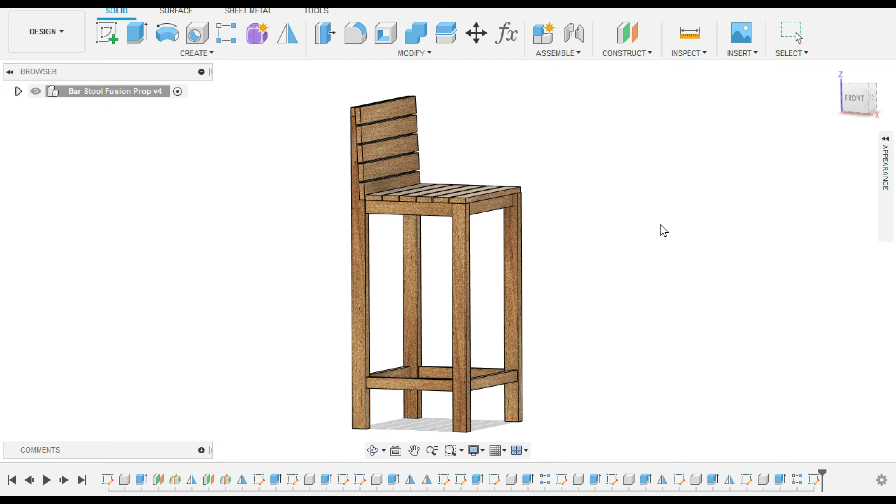Okay, the first thing I'm doing is saving the file. The reason I'm doing this, and I don't always show it, is that you always want to save at the very beginning in Fusion 360 because it starts the auto save feature kicking in. So always save your project first. From there, I just select the plane I'm going to be using and get right into it.

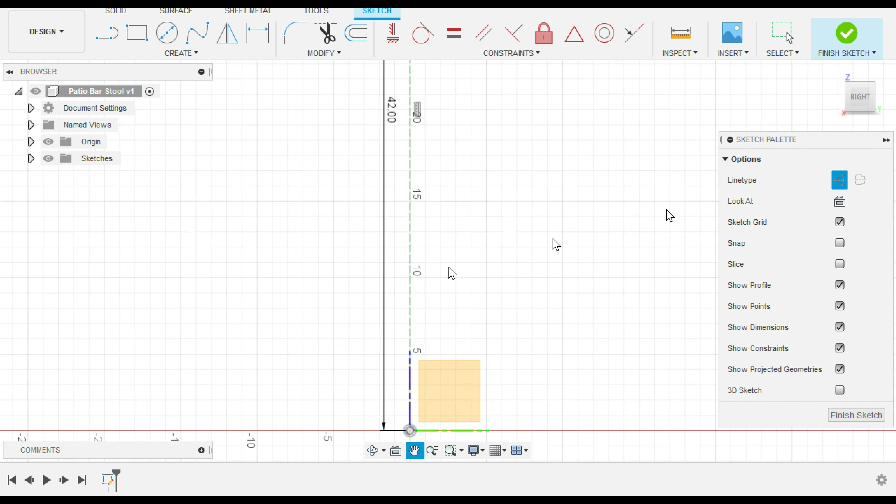And I am doing a construction line first on this one. I don't always do that, but it does help tremendously, again, for mirroring or anything along those lines.

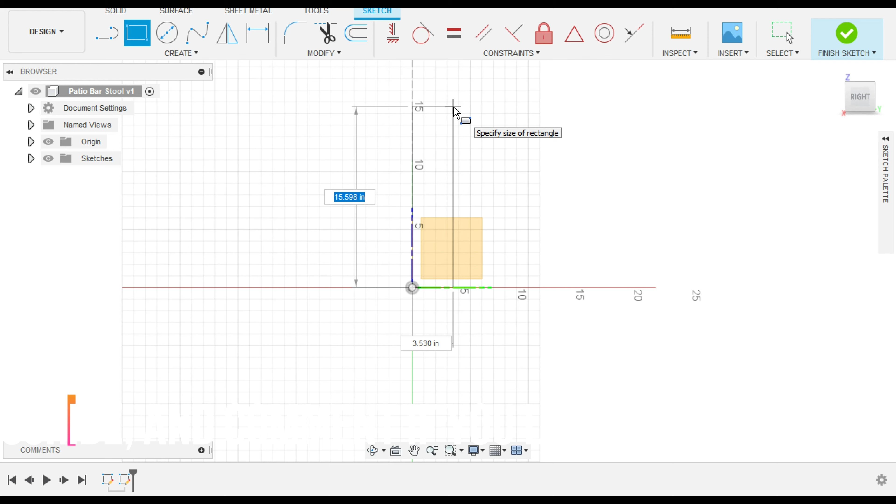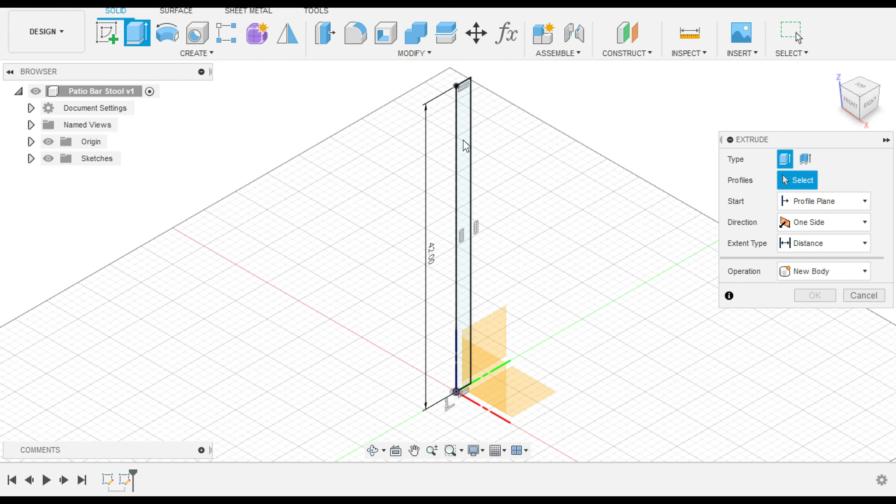I didn't do parametric modeling on this one because I didn't really think someone was going to want different size patio chairs, height and width, on this particular design. It's a very specific design. When I go to extrude this, I couldn't really decide if I wanted to bring the legs out like a 3-inch leg or a 2-inch leg, so I kind of met in the middle because I wanted to keep it a simple looking patio chair, but I wanted one thing for sure, and that is a back, because these are more of a bar stool than a patio chair. I probably should have said that at the beginning.

Okay, so we're setting up the offset planes so that we can then set up, as I did there, the mid plane so that we can mirror all of these components.

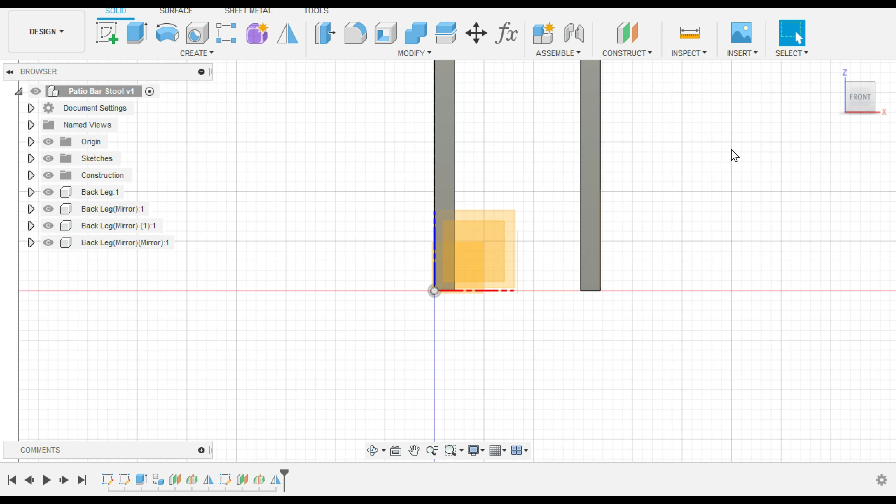So the back legs are going to be copied up into the front. Now, I'm not going to have a bar stool, as you saw at the beginning, that has all 4 legs that are the same size. You're going to see a little bit here in the video how I go about getting the front legs shorter than the back.

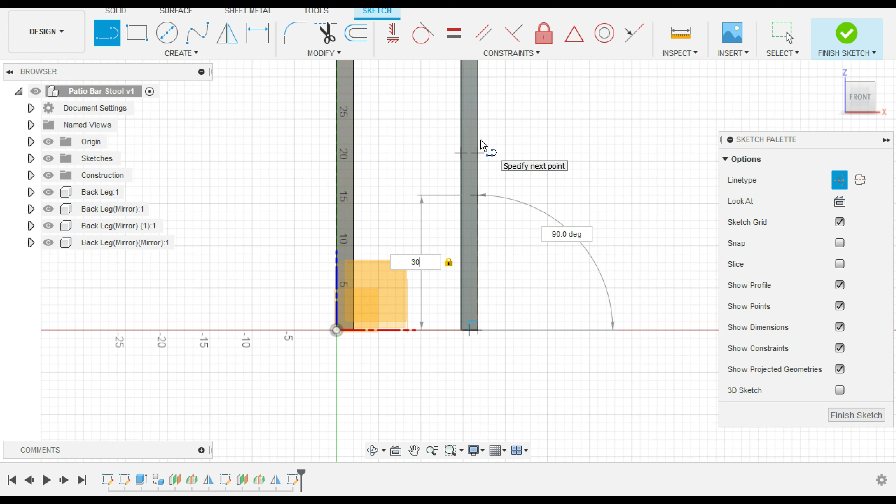So what I'm doing here is setting the construction line to the height of the seat that I want. This way I can cut this material.

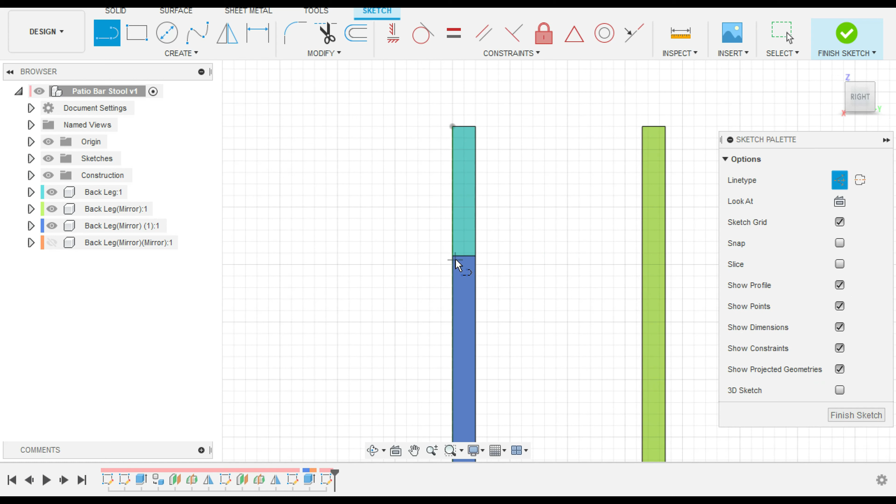So as you can see, I've changed the colors of the components. This is so helpful in this particular situation as an example, because I need to hide the front legs of this bar stool so that I can draw in the supports from behind them. I couldn't do that if it was in the way, so I can turn one off. I know that I turned off the right one because it has the correct color. Not only that, but you can see the correct color on the right with what I'm working on in the sketch, and on the left, you can see it in the list, so you know which color you're working with by simply using this feature.

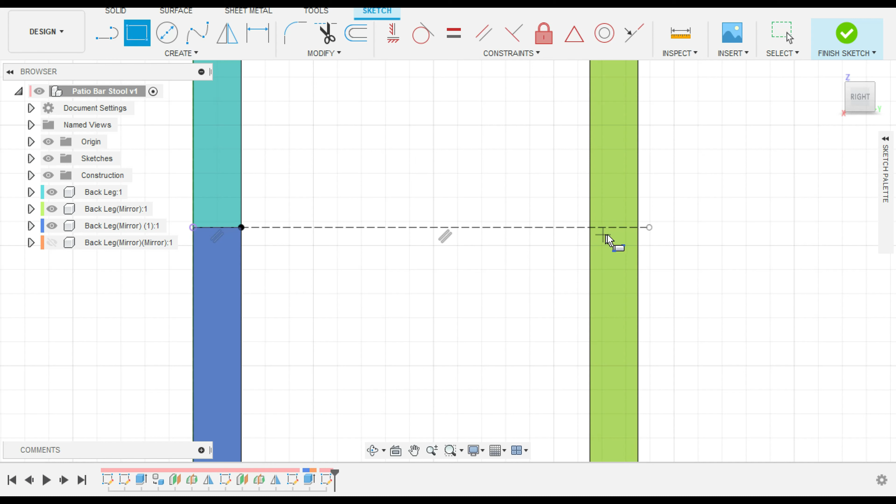And also this construction line, which I'm drawing across from the leg that is still turned on in the front, is going to serve two purposes. It's going to let me know where the leg height is supposed to be, and it's going to allow me to have something to tie constraints to for the locations of the seat supports, which I'm drawing in now. I will use the construction line to make them collinear.

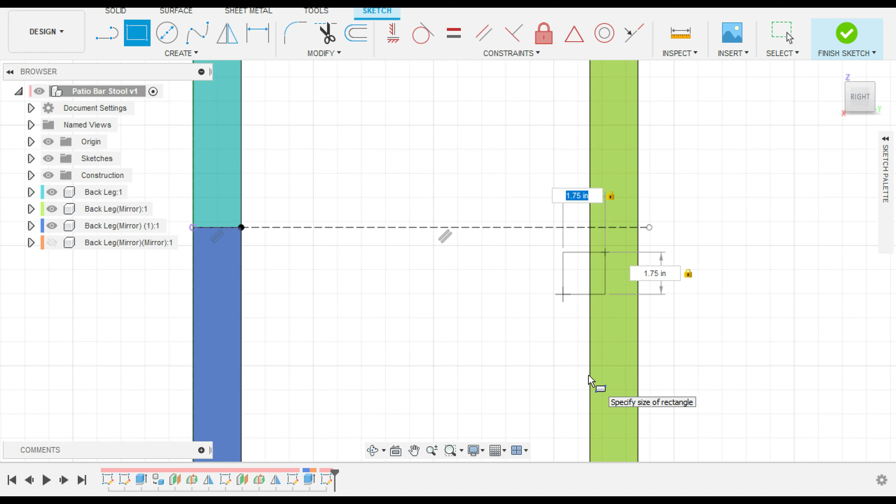So just a great feature, being able to turn the components into all different colors so that you can easily see which one you're working with.

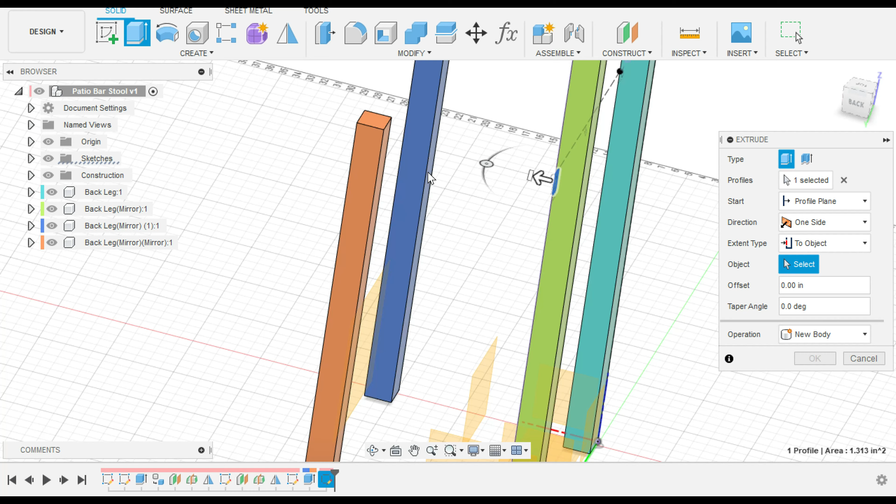So once you have that sketch drawn in, you just extrude it to the object, which is the front leg, and those two will be at the correct length and perfectly matched up.

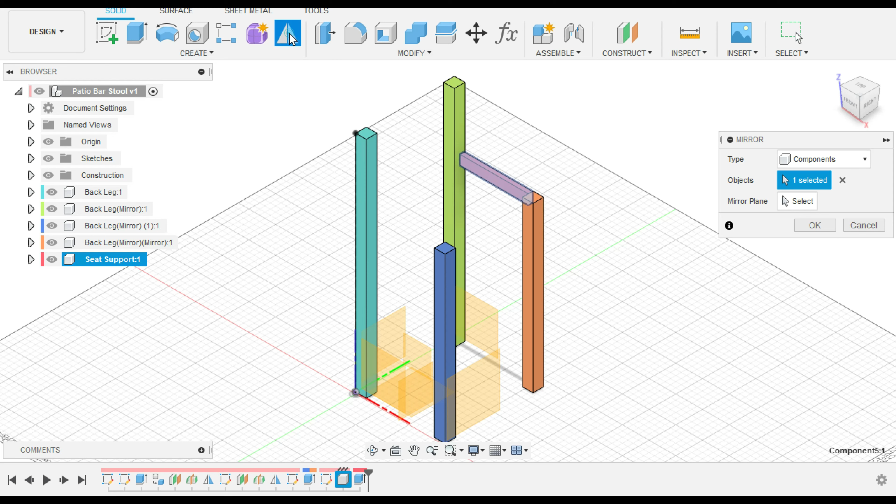Now, you may be wondering, if you're a woodworker, how am I going to attach these parts? I'm not going to use just wood glue and duct tape. I will probably use pocket screws, which is why you're not seeing a mortise and tenon setup. Now, I may still change to a mortise and tenon connection for these joints, but I'm not doing it on this video, but I will do one in a future video if you're interested. The mortise and tenon joints used in woodworking can be easily added to, well, maybe not easily added, but once you learn how to do it, it's pretty simple, into Fusion 360.

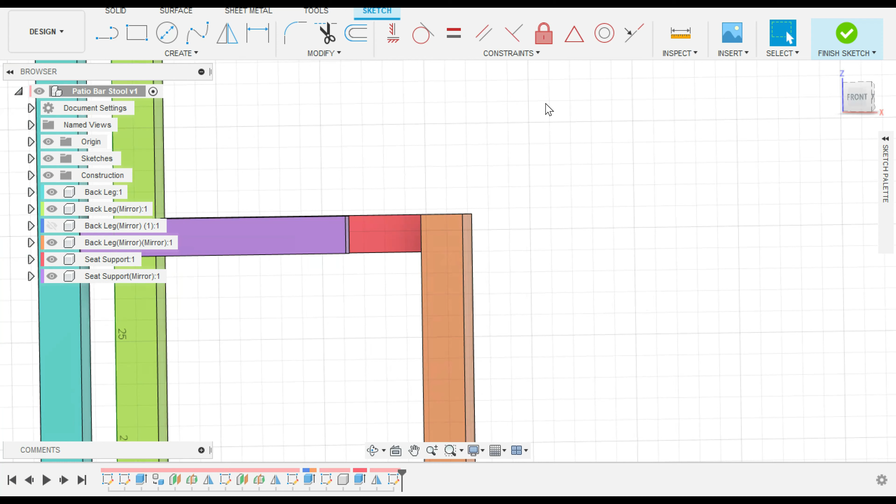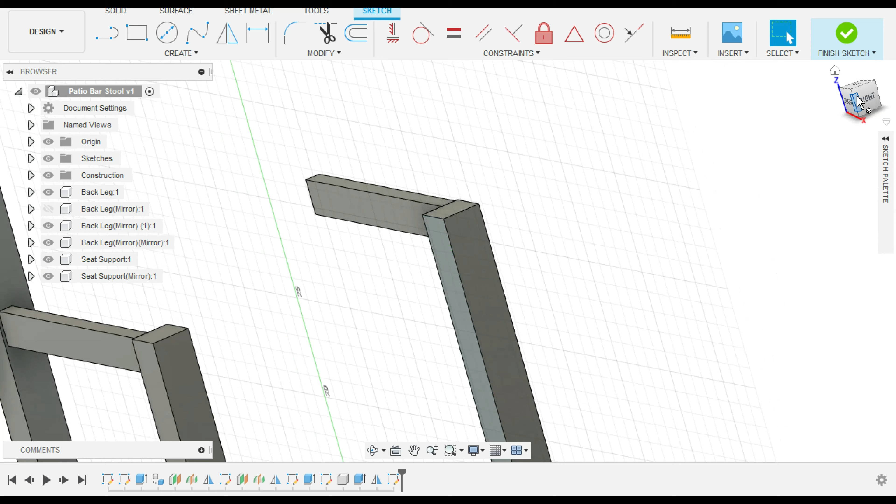And also when you go to print your part, say you're using a CNC machine, the mortises and the tenons and everything will reflect that on your actual components on your material list that you can export. So another great feature of Fusion 360. It's just got a great way of putting those particular joints into your woodworking projects.

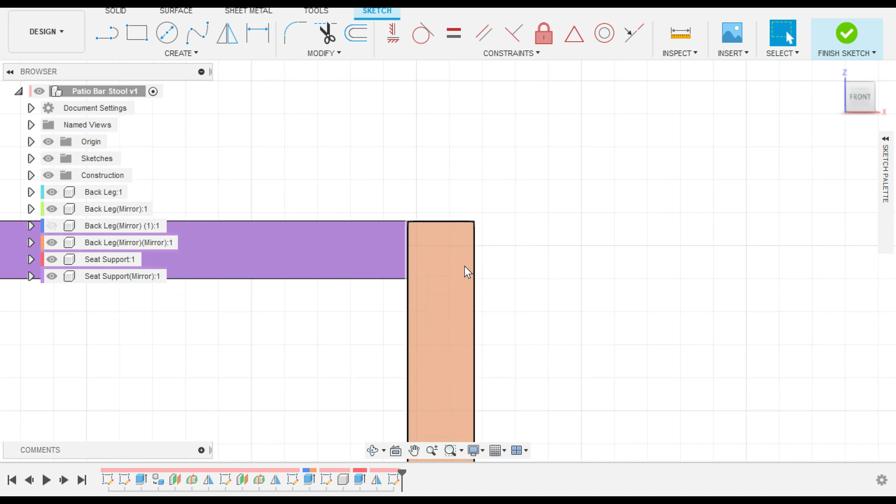And again, by using the construction planes, I can easily mirror the seat supports over on both sides, and I can add the ones in the front as well, here in just a minute, which you will see here shortly.

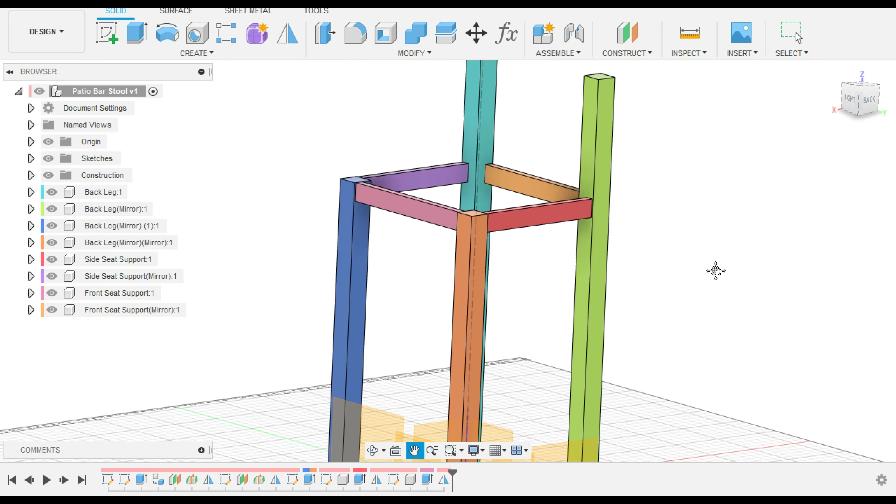There you have it. So once you have all of those mirrored over to their correct locations, you can repeat the same process and do a construction plane and then an offset mid-plane as well to make the duplicate seat supports down for your footrest, which obviously saves a ton of time.

So I'm basically setting the plane at the height that I want the foot rails to be placed, and I will duplicate the top seat supports right down to the bottom in just a click of a button, which will also populate on the left side for my component list for ordering wood and cutting wood the proper size. Just a great quick feature to use in Fusion 360 for woodworking.

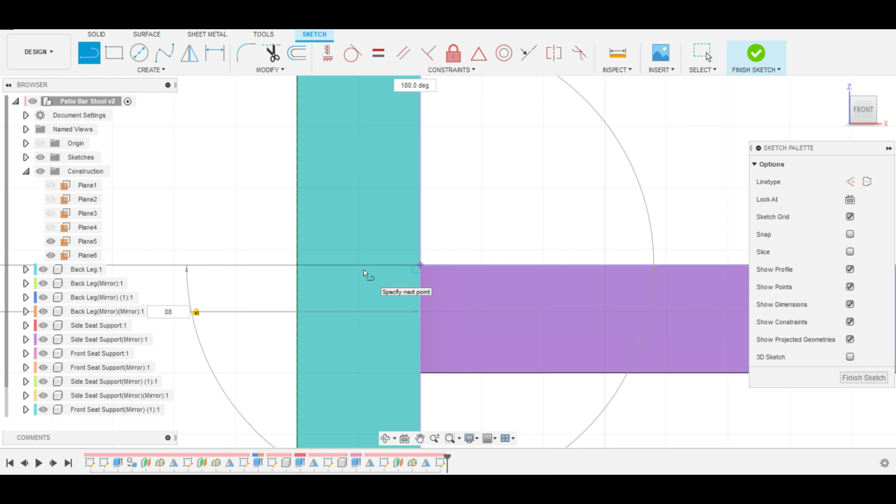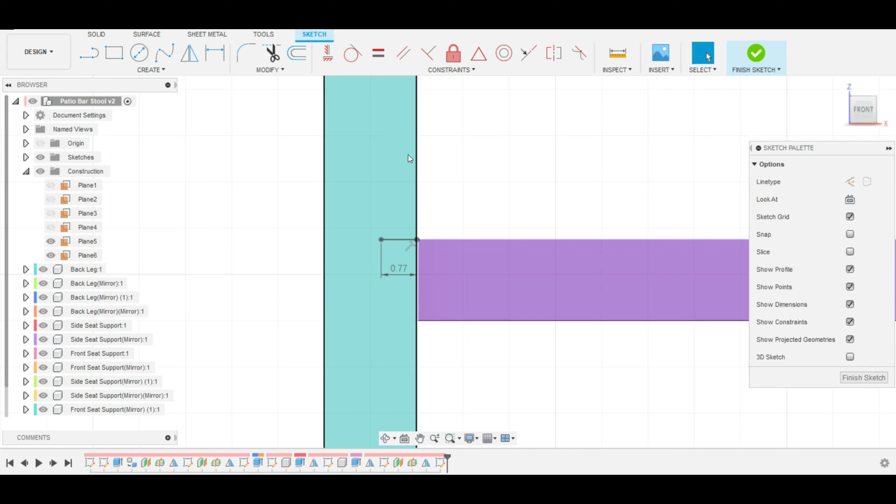Now what I'm doing here is creating the angle for the back seat so that it's not completely uncomfortable and vertical. In lieu of taking a larger piece of wood and cutting it at an angle, what I'm doing is taking the solid piece of the back legs, which are about 41 inches, and using that material to cut through at the angle I want. This can easily be done on a table saw or miter saw, whatever you want to use, probably a table saw, to achieve this angle so that you can put the back seat slats at an angle for a little bit more comfort.

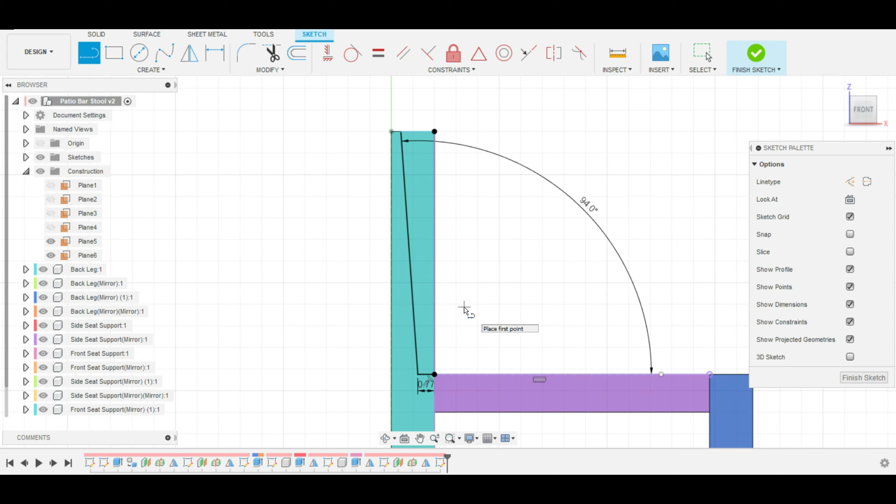So that's what I'm doing here. I'm connecting these lines so that I can extrude them the opposite way to cut them out, in lieu of joining them or creating an entire new component. Just one way of doing it that I found to be the easiest.

So there you have it. It's pretty easy. Now, it did leave some behind, as you can see at the top. I do not know how that happened. I thought I had clicked the very top of the material, but I guess I didn't. So I just simply, to save time, click on these and extrude them the opposite way to get rid of that material.

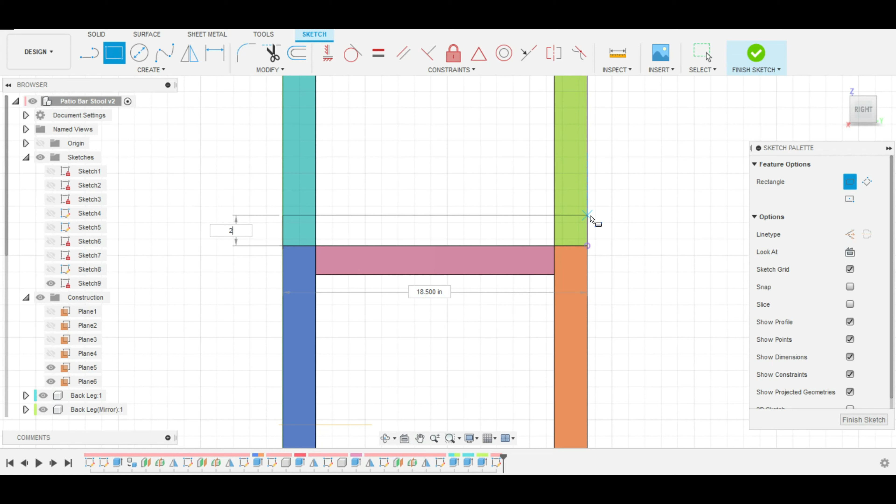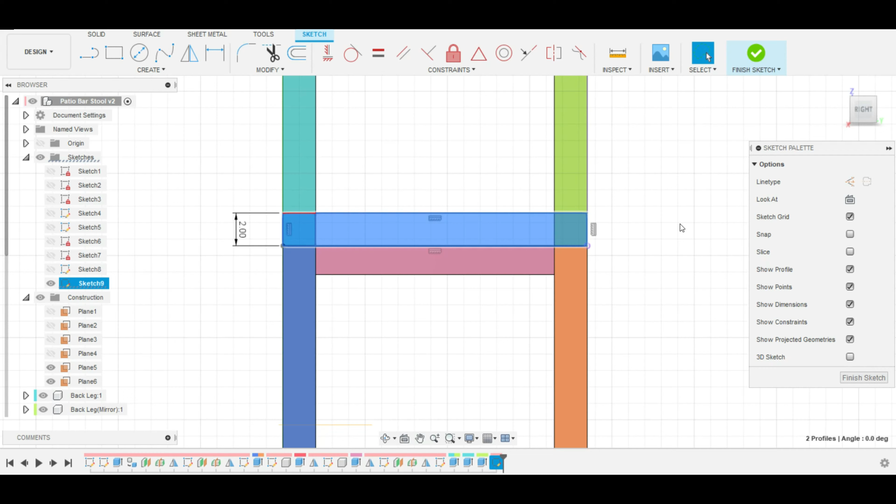Okay, so what I'm doing here is just getting the size that I think I want the slats to be, because I'm going to do a pattern on the path here with these 3/4 inch slats, all the way to the top of the chair, and bring it up a little bit, maybe an inch or an inch and a half, so that I can put another piece behind the top piece, if you will, on the seat back, to make it appear from the side that the back legs are one solid piece going up to the top.

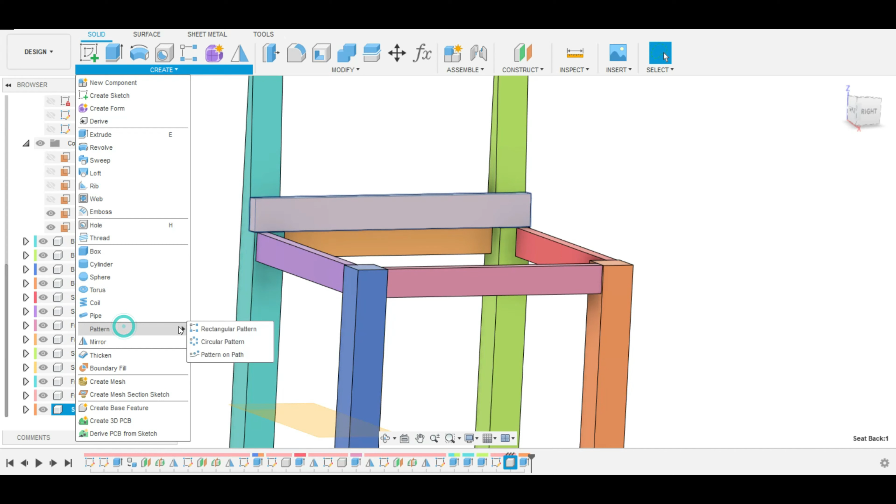You'll see, if you saw it at the very beginning of the video, the top had a little piece hanging over the back, but that's kind of what I'm doing. So it's a little bit of trial and error here to get these slats the right width, because it matters - you want a gap in between them, and you need enough material to go to the top. I think I had to redo this twice to get the right length or width on these slats.

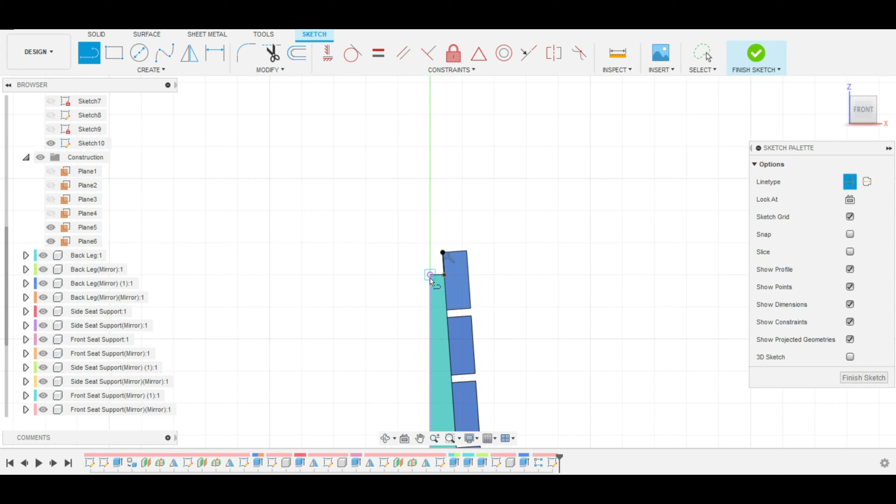Okay, so that's done, and you're seeing now what I'm talking about. If you didn't understand it a minute ago, this will simply give you a piece that appears to bring that top leg all the way up, just making it look a little bit more beefy at the top, if you will. And you can join these two components together.

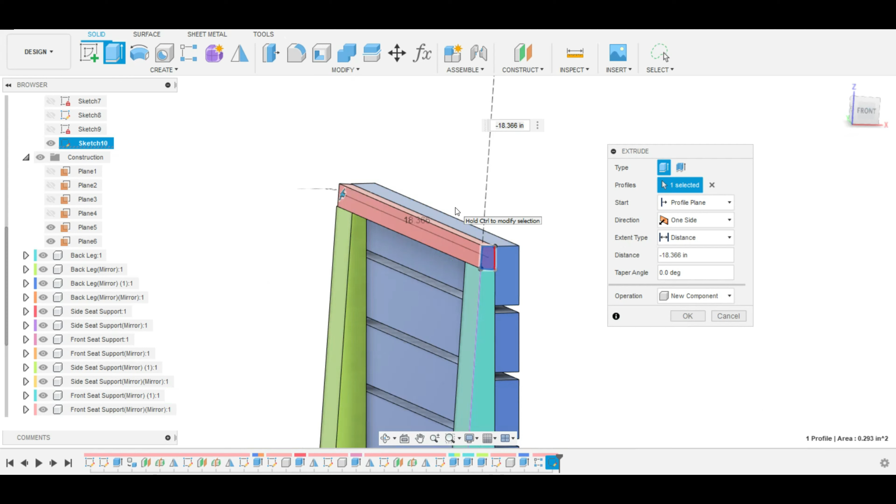The top seat piece and this one - I didn't do it here, but just for time. But you see how it's going to look, and I'll probably cut that top piece out of one solid piece of material, in lieu of doing a separate little piece there on the back, because it would just probably separate or break off.

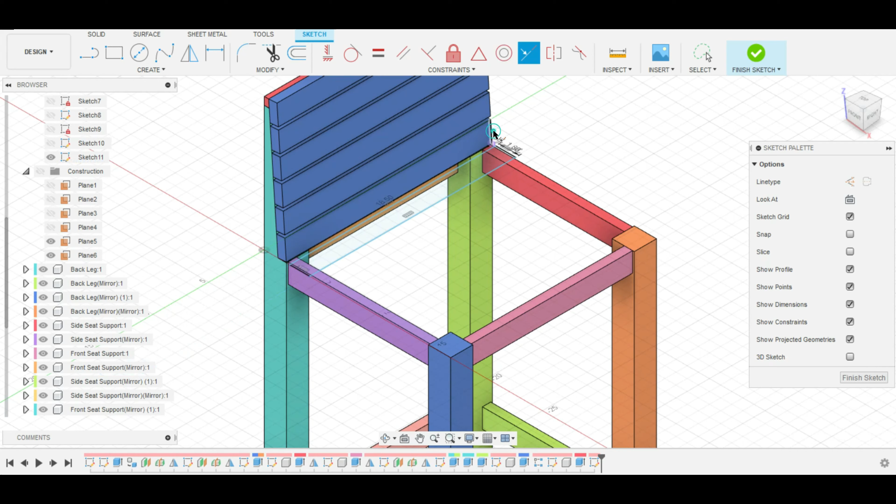All right, just designing the seat slats here and using the constraint feature to make the lines collinear so they match up perfectly. And I believe I had the overall length wrong here. Yeah, 18 and a half - it should have been 18 and 3/4.

And I caught that after I'd already done a pattern on path and moved these along where they were going. I didn't have the overhang that I needed on the front side, so I had to redo these, which I think I left in the video, just so you can see how I did it and how I caught it.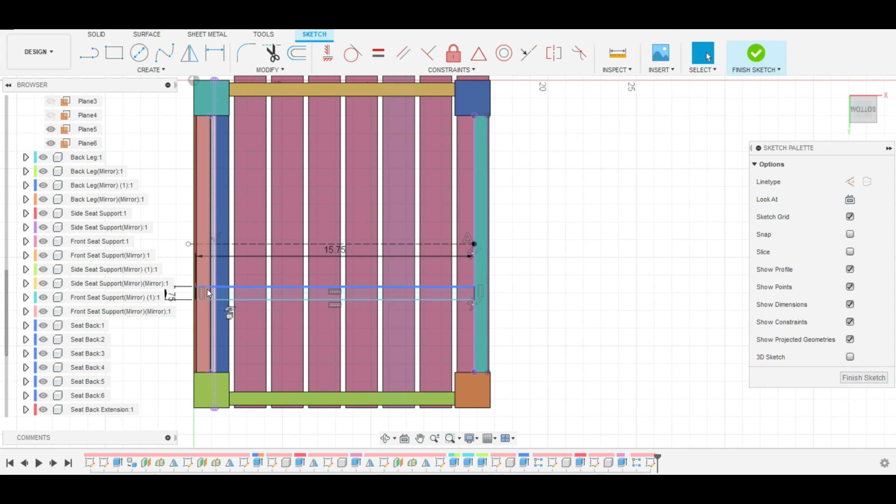And the back ones, you can be creative to hide those, but it probably needs a little bit more support, definitely in the back, in case someone decides to lean back.

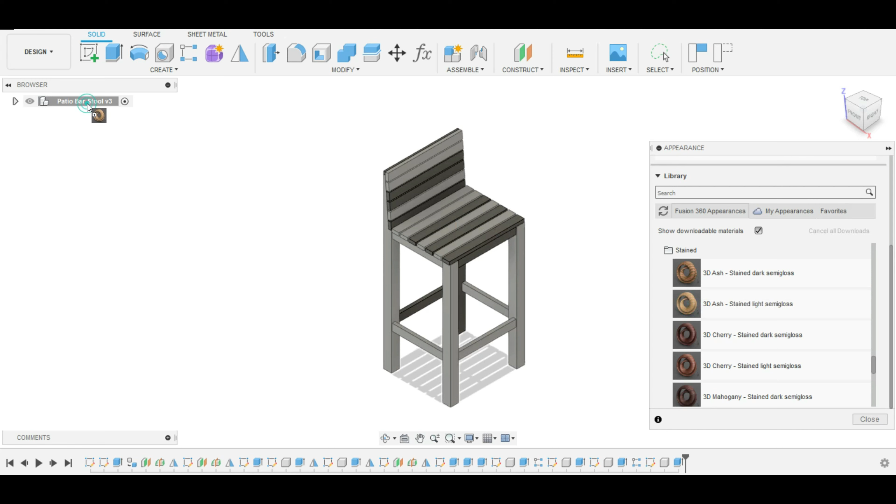And there you have it. All you do now is select a finish and send this rendering on its way to your client. See if they approve, give them a material list - they can make it themselves, they can buy the list from you, or you can give it away for free and show them what they're going to get. Or you can just make the chair for them.